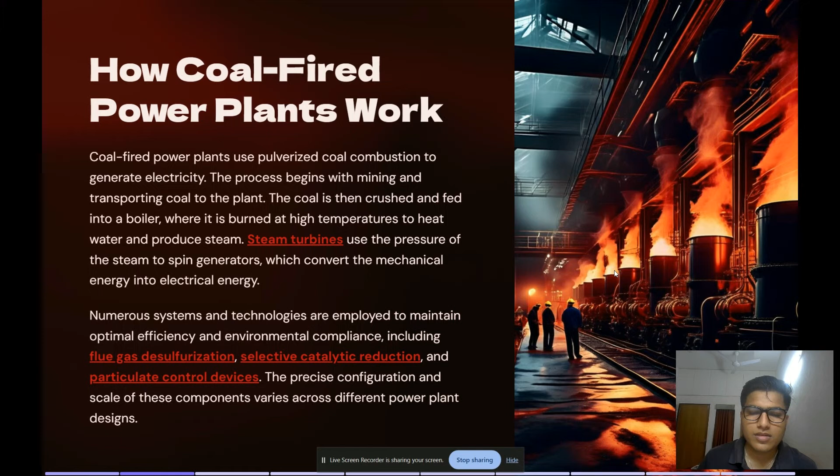The role of coal in electricity generation. Coal has been a dominant source of electricity generation globally for decades. Coal-fired power plants account for a significant portion of the world's electricity supply, providing a reliable and affordable energy source. However, the reliance on coal has come with environmental and health concerns that have led to increasing pressure to transition to clean energy alternatives.

Coal is a primary fuel used in thermal power plants to generate steam and drive turbines that produce electricity. Coal-fired power plants are widely distributed across the world.

With major concentration in countries with abundant coal reserves, such as China, India, and the United States. The abundance and relatively low cost of coal have made it an attractive option for electricity generation, particularly in developing countries with growing energy demand.

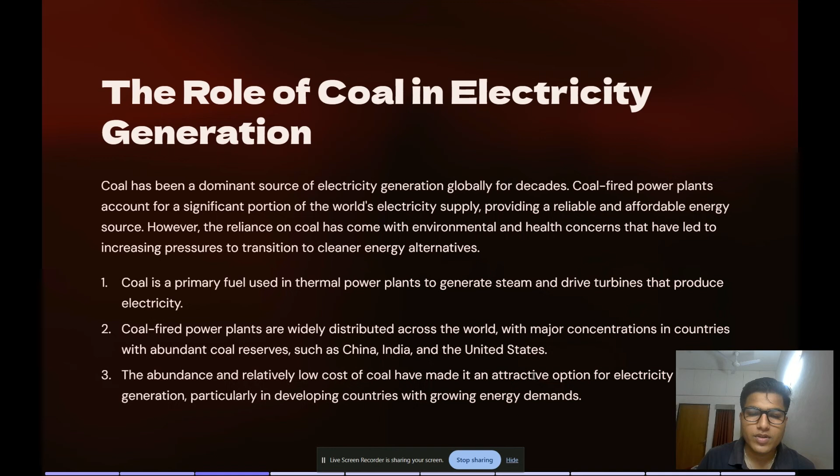Environmental impact of coal-fired power plants. Coal-fired power plants have significant environmental consequences, contributing to air pollution, water contamination, and greenhouse gas emissions. The burning of coal releases harmful

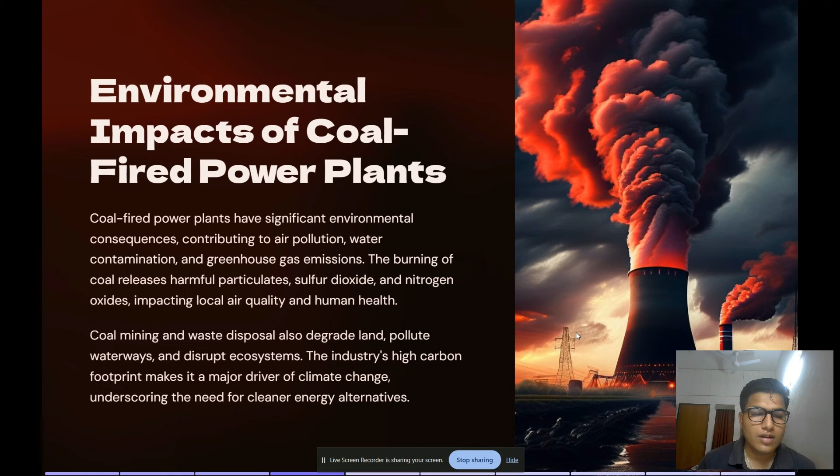particles, sulfur dioxide and nitrogen oxide, impacting local air quality and human health. Coal mining and waste disposal also degrade land, pollute waterways, and disrupt ecosystems. The industry's high carbon footprint makes it a major driver of climate change, underscoring the need for clean energy alternatives.

Emission control technologies: flue gas desulfurization scrubbers remove sulfur dioxide from exhaust gases, reducing acid rain causing emissions.

Particulate removal: cyclone, electrostatic precipitators and baghouse filters capture fine particulate matter like ash.

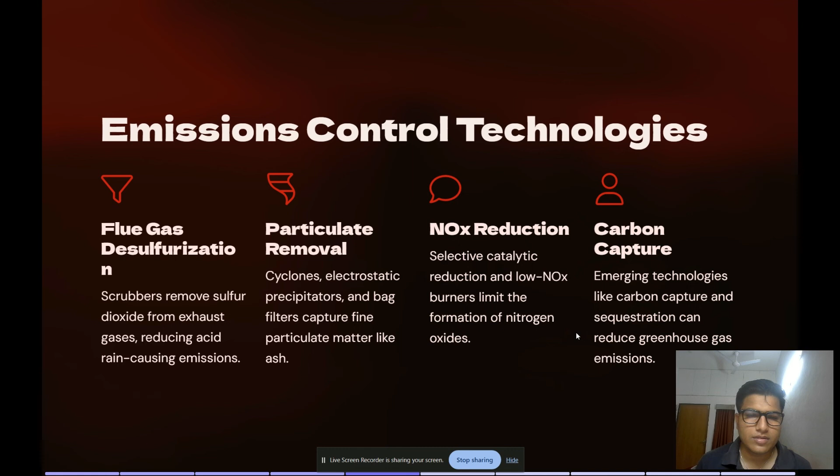The challenges facing the coal industry. These are the four major steps the coal industry is facing right now.

Declining demand: shift to renewable energy sources. Increasing regulations: stricter emission standards as more governments try to implement policies on coal-fired power plants to reduce carbon emissions. Aging infrastructure: costly upgrades needed, and market competition from natural gas and renewables.

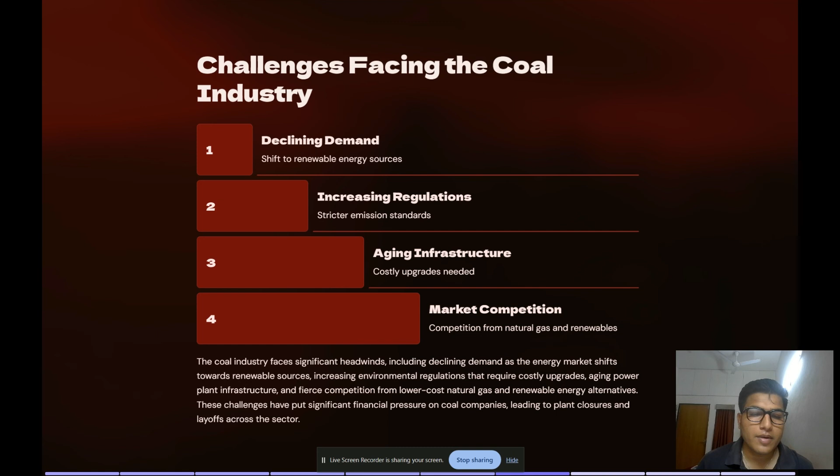The coal industry faces significant headwinds, including declining demand as the energy market shifts toward renewable energy sources, increased environmental regulation that requires costly upgrades to aging power plant infrastructure, and fierce competition from lower cost natural gas and renewable energy alternatives. These challenges have put significant financial pressure on coal companies, leading to plant closures and layoffs across the sector.

Transition to clean energy sources. As the world shifts toward a more sustainable future, the transition to clean energy sources is a critical priority. This involves reducing reliance on coal-fired power plants and embracing renewable energy options like solar, wind, and hydroelectric power.

Governments, industries, and communities are actively working to implement policies, technologies, and infrastructure to support this transition, paving the way for a cleaner, greener energy landscape.

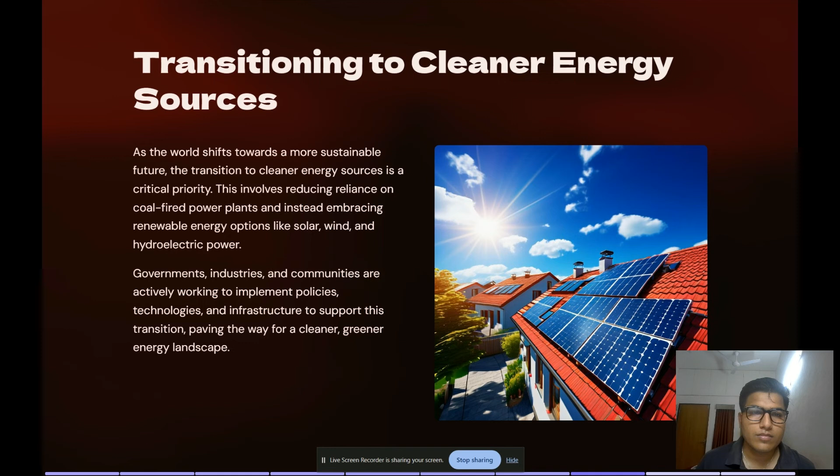First is phasing out older plants, retiring inefficient coal-fired power plants. Improving efficiency: upgrading remaining plants with advanced technology. Emission reduction: deploying carbon capture and storage solutions.

The future of coal-fired power plant generation will likely involve a gradual phasing out of older, less efficient plants. Remaining facilities will need to focus on improving operational efficiency and deploying emission control technology to reduce their environmental impact. Ultimately, the long-term viability of coal power will depend on the industry's ability to adapt to evolving energy and climate policies.